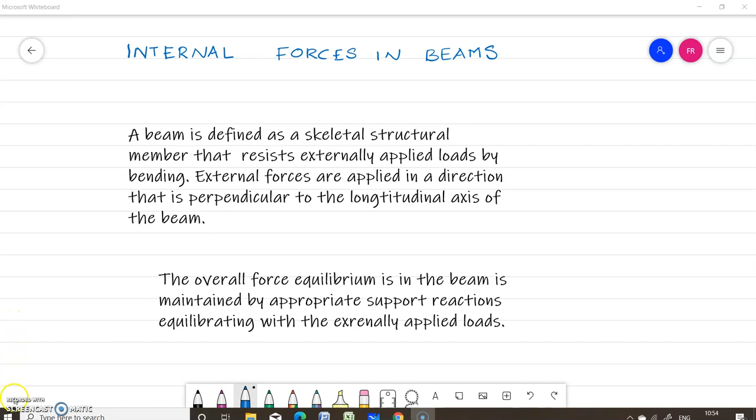So due to the action of the forces or the loads in a beam, inside the beam internal forces are developed due to the bending action. Okay. So the main internal force resultant in a beam is the bending moment, which is obtained by considering the moment equilibrium.

So how are we finding out the internal forces? By considering a free body of a part of the beam, we expose the internal forces, including the reactions acting on the free body. So you have to expose what the internal forces are, and we can expose them by including the reactions acting on the free body. So the main internal force resultant is the bending moment. And how can we obtain this? This is obtained by considering the moment equilibrium equation.

What is the moment equilibrium equation? Sigma M equal to 0 on a free body exposing the section at a location x along the longitudinal axis of the beam. So you can find out the bending moment at any section of the beam by considering the free body of that portion, exposing all the forces acting, including the external loads and reactions, and finding out the bending moment at a particular section.

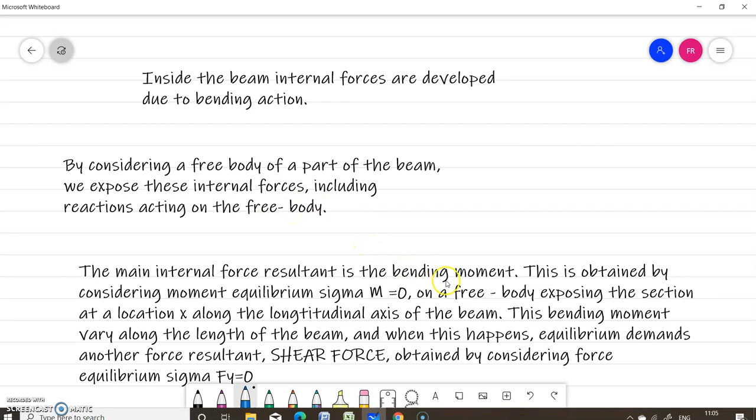So our aim is to find out the internal forces. We can find them by drawing the free body diagram of the beam, considering all the loads including the reactions. For that you have to consider the free body diagram of the beam for a particular section, expose the section, and find the moment by taking the algebraic sum of moments of all the forces acting on that particular section.

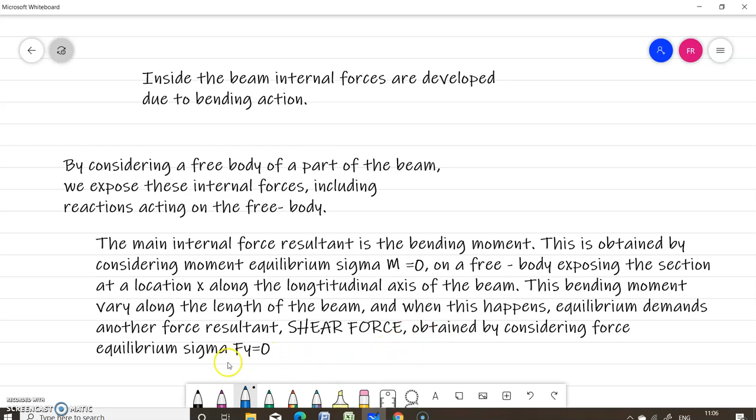So due to this variation in bending moment along the length of the beam, there will be another force resultant arising, that is the shear force, and this can be obtained by considering the force equilibrium equation sigma Fy equal to 0. Now we'll see the notations and sign conventions we are using.

The usual notation for load intensity is small w, shear force capital F, or sometimes SF, bending moment capital M, or BM. Small x is the distance measured from the origin, say the left support, along the axis of the beam. So if you have a beam like this, we take the section line and the distance small x from the left support. So here it becomes 0, and 0 to x, like that.

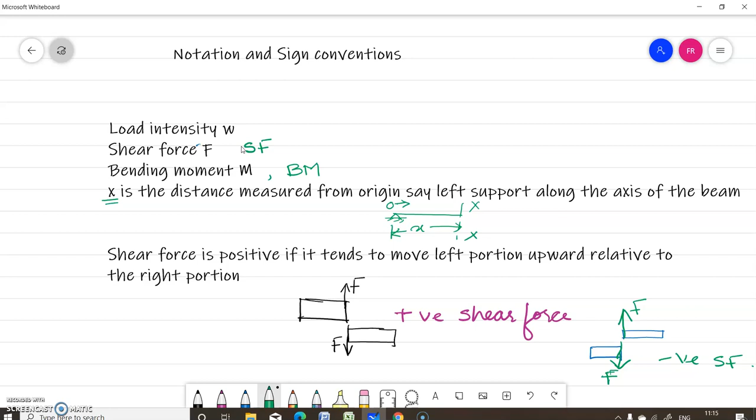Now we have to see the sign convention we follow when finding the shear force at a section of the beam. Shear force is positive if it tends to move the left portion upward relative to the right portion. So here you can see this shear force is trying to move the left portion upward relative to the right portion, so it is taken as positive shear force.

Or you can take all the forces to the right of the section downwards as positive and upwards as negative. So if you have a beam like this, and it is subjected to a number of forces, and if you are taking a section line like this, all the forces which are acting to the right of the section acting downwards are taken as positive, and all the forces to the right of the section acting upwards are taken as negative.

So for negative shear force, if the shear force is negative, it tends to move the left portion downward relative to the right portion like this. If the tendency of the shear force is to move the left portion downward relative to the right portion, then it is taken as negative shear force.

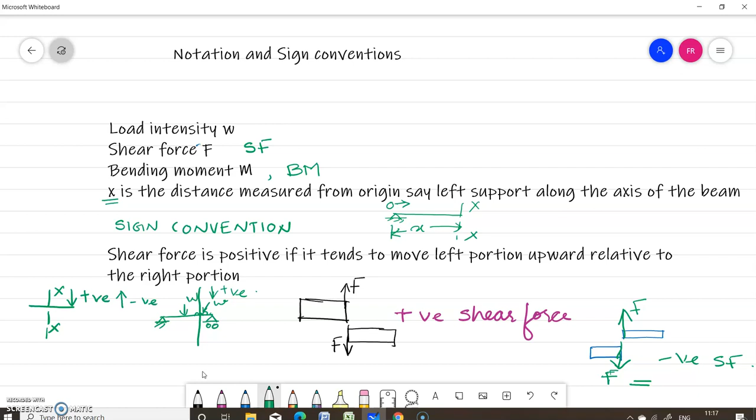Or if you are considering a beam and taking a section line, all the forces to the right of the section acting downwards are positive, and all the forces to the right of the section acting upwards are negative. So this is the sign convention we are following in the case of shear force.

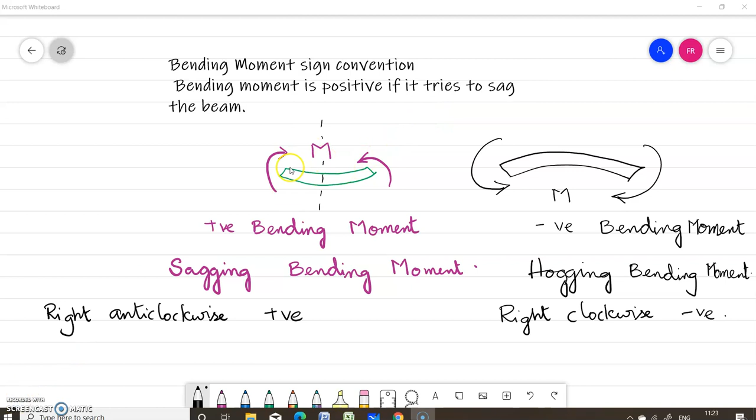Now we'll see what is the sign convention of bending moment. Bending moment is positive if it tries to sag the beam. So here you can see a beam. Now let this be the section line. So we are taking the moment right anti-clockwise. This is a moment which is acting in the anti-clockwise direction. This is a section line.

Right of the section anti-clockwise produces positive bending moment, that is sagging bending moment, and hence left clockwise is positive. So all the moments to the right of the section anti-clockwise are taken as positive, and all the moments to the left of the section clockwise are taken as positive. So this too will cause a sagging bending moment, and this sagging bending moment is taken as positive.

Now this is the negative bending moment. So if you are taking a section line here, the moment on the right of the section line which produces a clockwise moment, right clockwise, produces negative. So right clockwise bending moment is negative and left anti-clockwise is negative. So these two will produce a hogging bending moment.

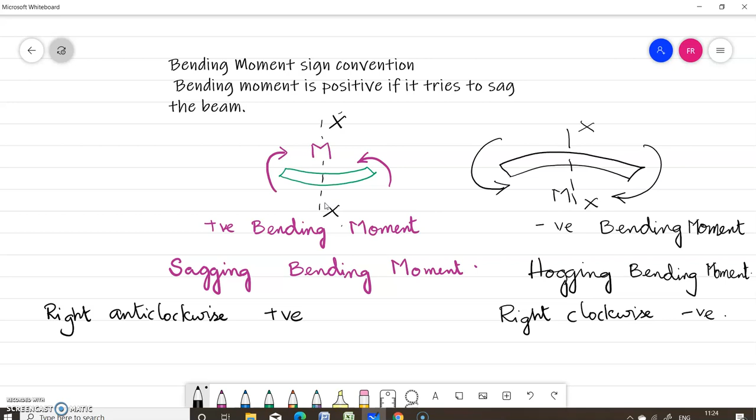So if the curvature is upwards, it is hogging bending moment. If the curvature is downwards, it is sagging bending moment. So these are the section lines. About the section, we are always defining the sign convention for bending moments.

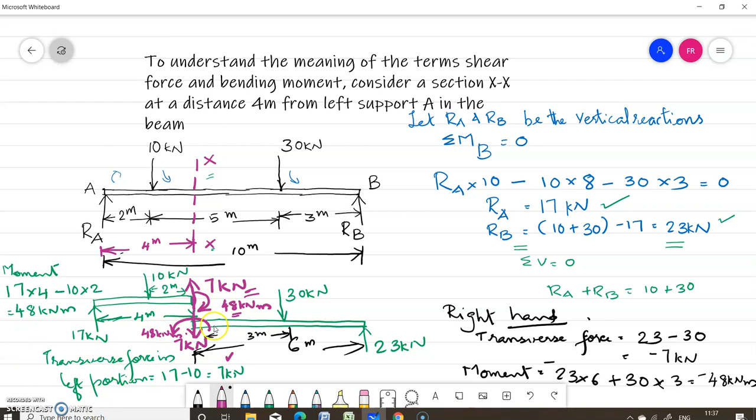So thus the section XX considered is subjected to force 7 kilonewton and moment 48 kilonewton meter. This force 7 kilonewton is trying to shear off the section, and hence it is called the shear force. The moment bends the section, and hence it is called the bending moment. Shear force F at a section in a beam is the unbalanced vertical force that is trying to shear off the section, and it is obtained as the algebraic sum of all the forces including the reactions acting normal to the axis of the beam, either to the left or to the right of the section.

And bending moment M at a section in a beam is the moment that is trying to bend the beam and is obtained as the algebraic sum of the moments about the section of all the forces including the reactions acting on the beam, either to the left or to the right of the section. So this is how you have to define shear force and bending moment.

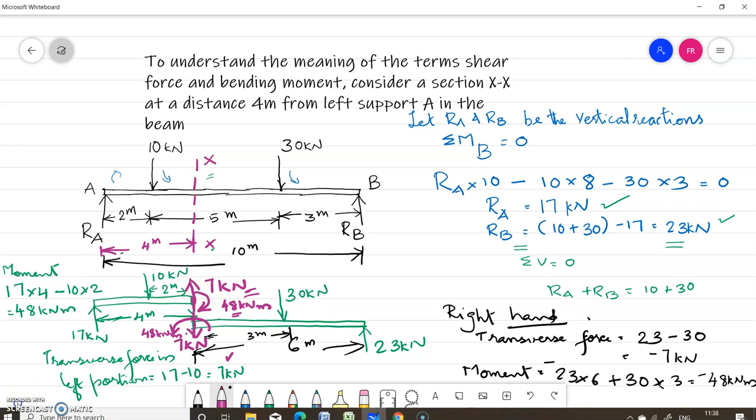Thus, the procedure to find shear force at a section is to imagine a cut in the beam at the section, consider either the left or right portion, and find the algebraic sum of all the forces normal to the axis. To find bending moment at a section, imagine a cut in the beam at a section and find the algebraic sum of all the moments about the section due to all the forces either to the left or right of the section.